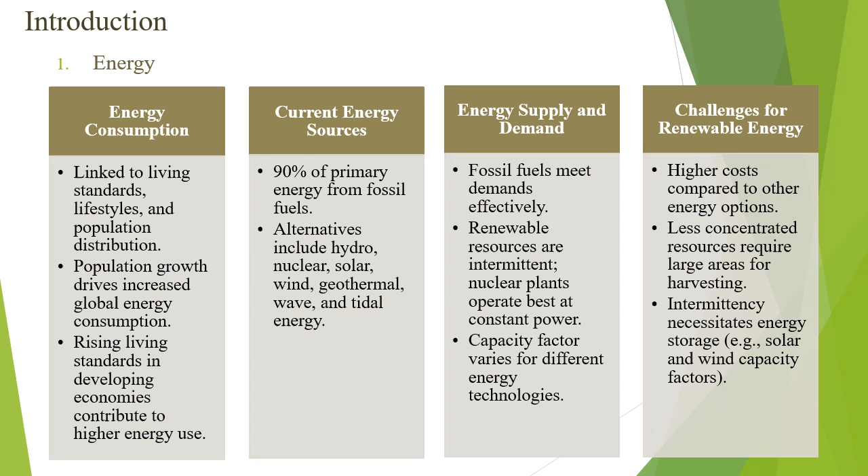So the problem is the environmental impacts of energy systems are significant, prompting many countries to conduct extensive assessments before approving new projects. These impacts include climate change, ozone depletion, acid rain, and smog.

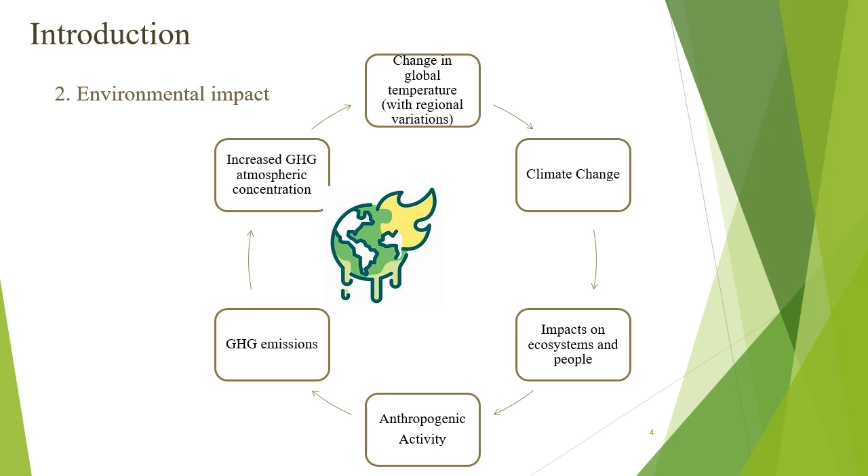Climate change driven by greenhouse gas emissions from human activities poses a major risk to humanity and has become a priority for policymakers. Fossil fuel combustion, which dominates global energy use, produces substantial carbon dioxide, the most significant greenhouse gas, necessitating efforts to mitigate and adapt to climate change.

To avoid these environmental problems, hydrogen is the best solution because it's a versatile energy carrier useful as fuel or for electricity and fuel cells. It is environmentally friendly, produced from water and returns to water after use. As a logical fossil fuel replacement, it complements electricity by meeting energy demands that electricity alone cannot. Its pros and cons arise from its unique properties.

The principal advantages of hydrogen include: producible, it can be made from hydrocarbons and water. It is used as a fuel and feedstock in industry. We will discuss more utilization of hydrogen in the next presentation. Hydrogen can be stored in various forms, unlike electricity.

It's easily transported and produces only water upon oxidation with minimal pollutants, and also it's recyclable, reverting to water after use, which can be converted back to hydrogen, and it enhances energy systems by fulfilling multiple demands.

For the disadvantages of hydrogen: its low energy storage density, leakage potential, materials compatibility issues, and the cost of production. Hydrogen production is expensive compared to fossil fuels.

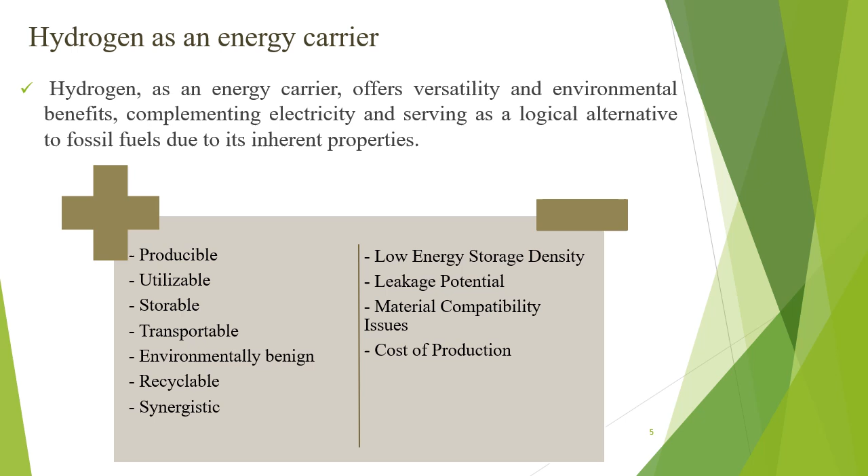Now let's discuss and talk about utilization of hydrogen. Fuel cells, the first utilization, convert hydrogen into electricity and heat with high efficiency, emitting only water. Used in hydrogen-powered vehicles, they offer a clean alternative to fossil fuels.

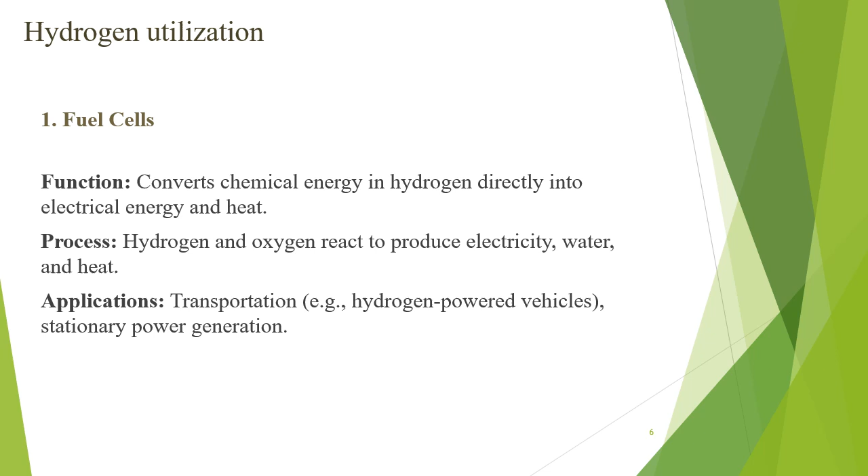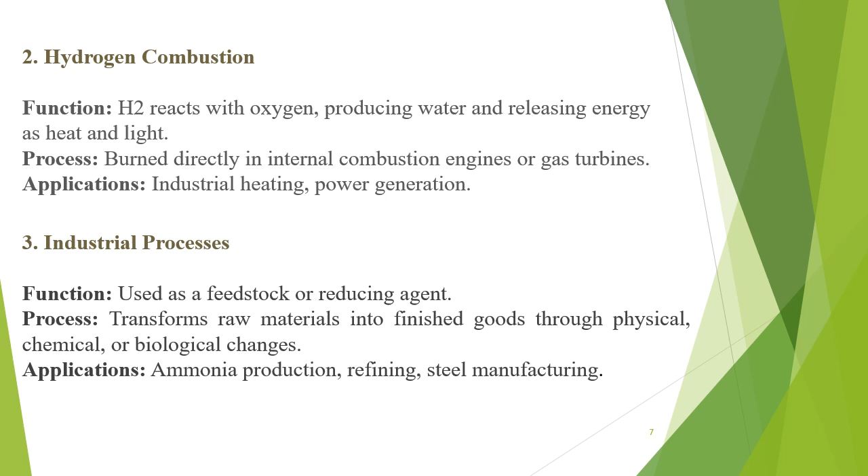We have hydrogen combustion, which burns hydrogen with oxygen to produce water, heat, and light, used in internal combustion engines and gas turbines. It's flexible but less efficient than fuel cells, with reduced emissions. Third one, we have the industrial process. Hydrogen is crucial in ammonia production, oil refining, and steel manufacturing, helping reduce emissions and enabling carbon capture.

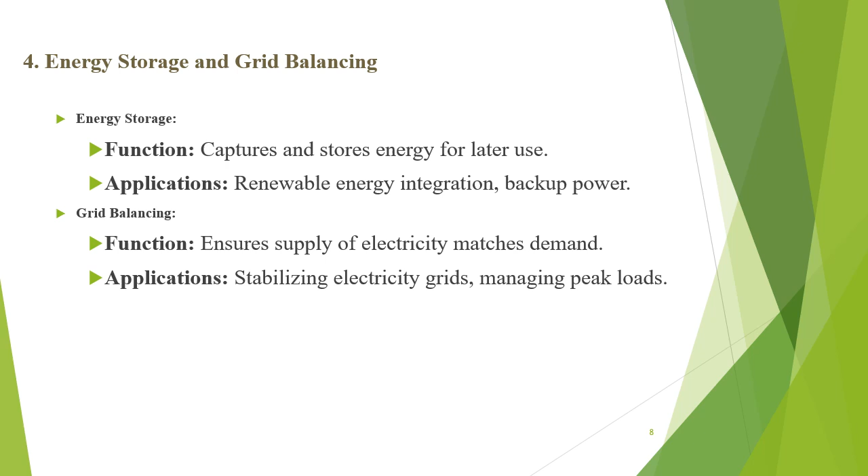Another utilization is energy storage and grid balancing. Hydrogen stores energy for later use and balances the grid, integrating renewable sources and providing backup power, enhancing system resilience and stability. Four main hydrogen production technologies.

Firstly, let's explore thermochemical production, which uses high temperature reactions with a feedstock like natural gas to produce hydrogen. Steam methane reforming is a common example, producing large-scale hydrogen but with high CO2 emissions and reliance on fossil fuels, posing sustainability challenges.

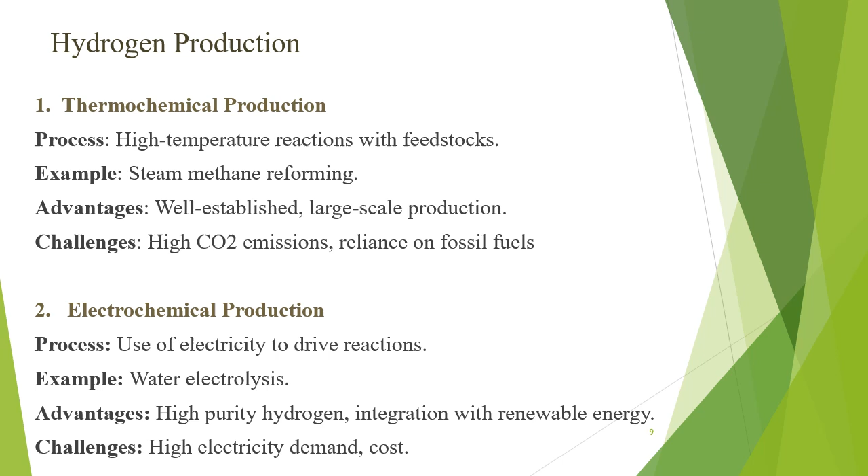Next is electrochemical production, where electricity drives a chemical reaction to produce hydrogen, such as through water electrolysis. This method can produce high-purity hydrogen and integrate with renewable energy sources, but faces challenges with high electricity demand and cost.

Biological production uses microorganisms or enzymes to produce hydrogen, like algae biophotolysis, which converts sunlight into hydrogen. It uses renewable feedstocks and requires low energy but struggles with low production rates and scalability; advances in biotechnology are needed to improve this method.

Lastly, photocatalytic production involves using photocatalysts to split water into hydrogen and oxygen using sunlight. Titanium dioxide photocatalysts are an example. This environmentally friendly method is still in development and suffers from low efficiency, requiring further research to improve its viability.

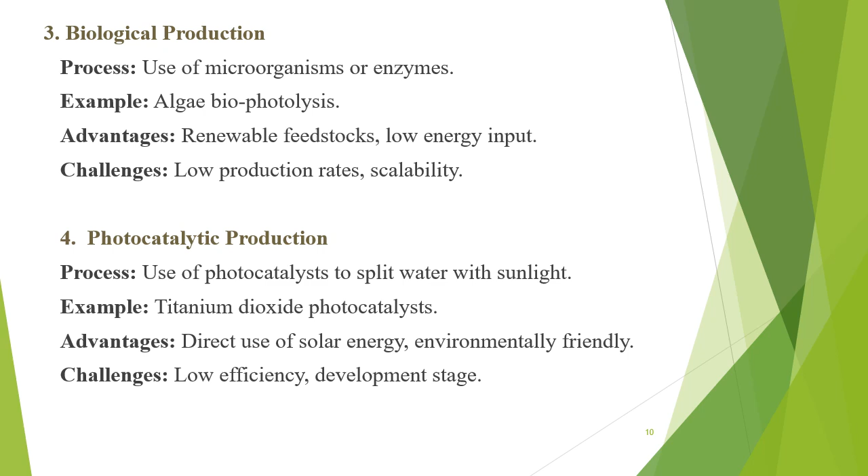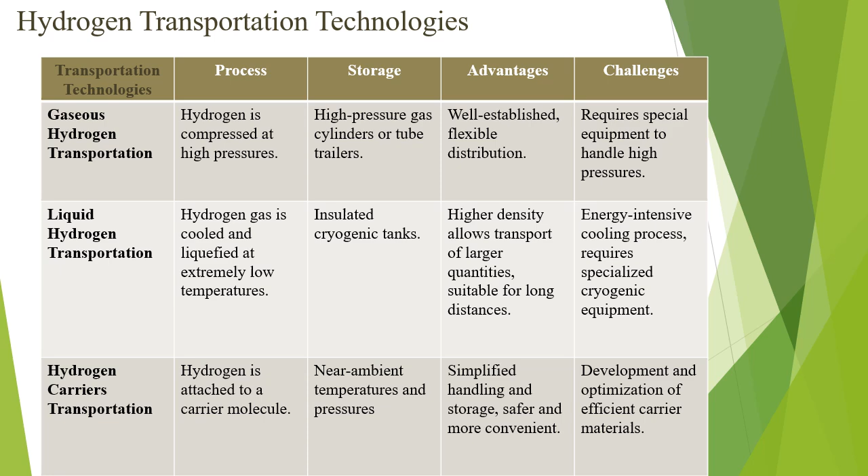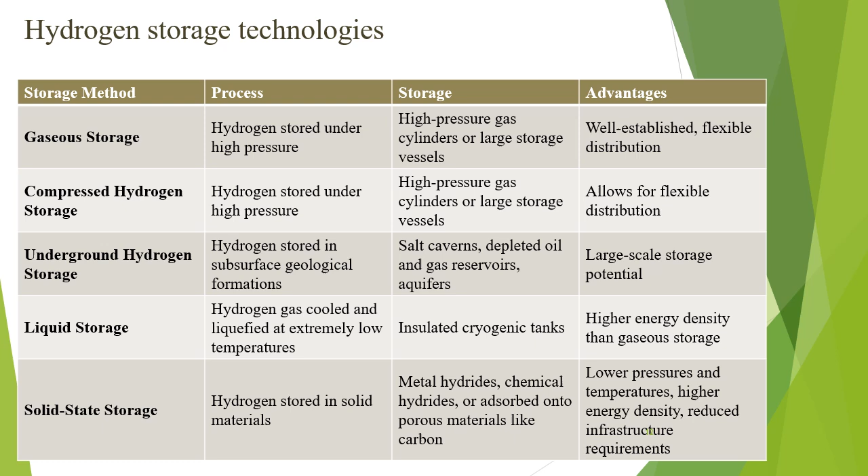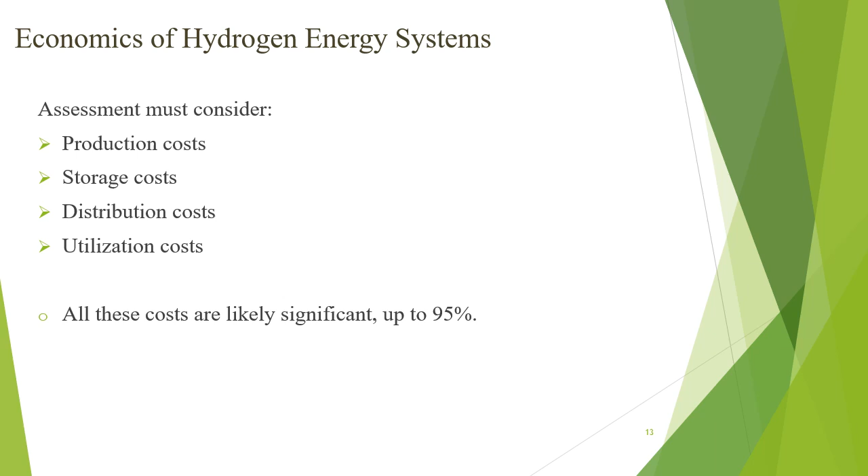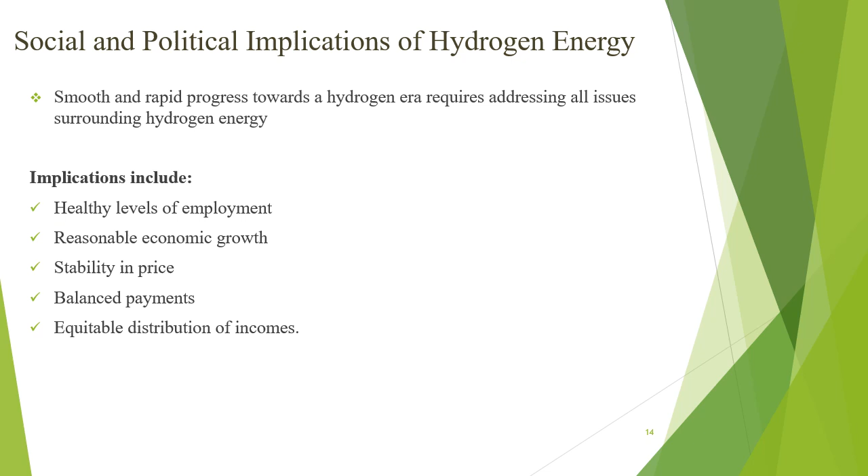Price stability: policies are needed to ensure stable energy prices and enhance energy security. Income distribution: benefits should be equitably shared, requiring measures to address disparities.

In conclusion, this presentation underscores the growing recognition of hydrogen's potential as a key player in the transition to sustainable energy. The exploration of hydrogen production, transportation, storage, and utilization technologies reveals a landscape rich with possibilities but also laden with challenges.